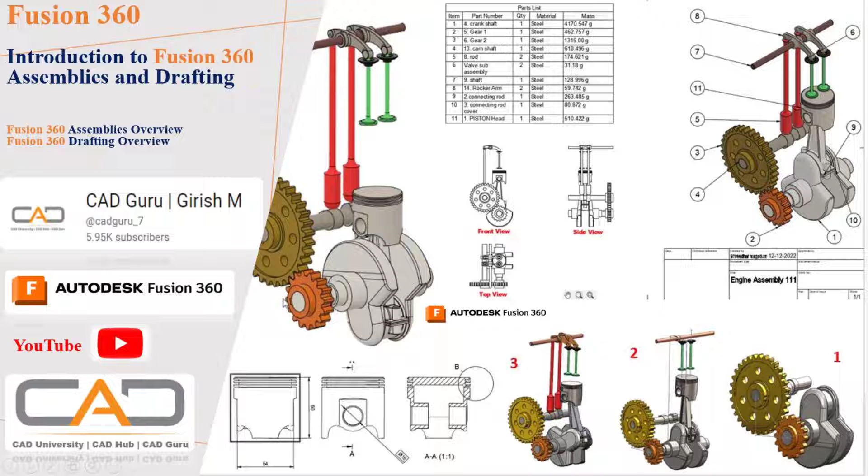You can create a project and add folders inside it, and save the components inside that folder. Let's say I'm considering an engine assembly here. For our convenience, I had already created the components and saved them into the folder. Now I have the components inside this Fusion 360 assembly, which I had already stored to showcase the bottom-up assembly approach. These are the components.

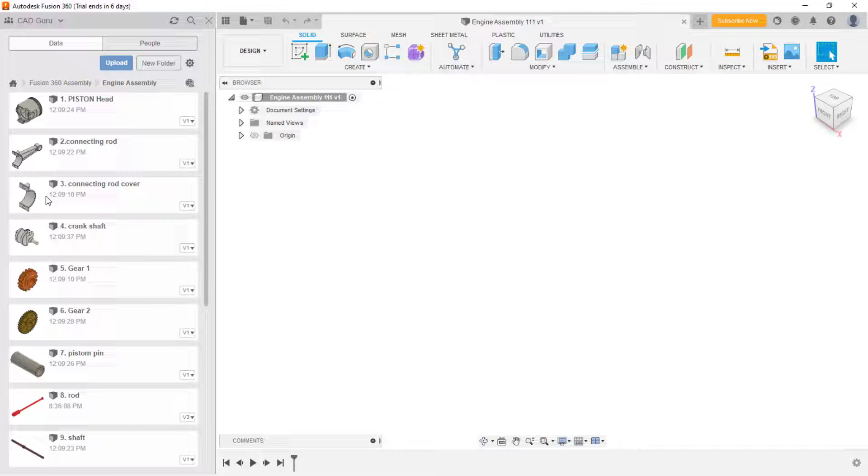Before dragging and dropping them and starting the assembly, I'd like to use the origin, and from this front plane create a sketch which will act as a reference. This is a triangle, so I'll take this as 65. Now I'll refer to these corner points as my reference.

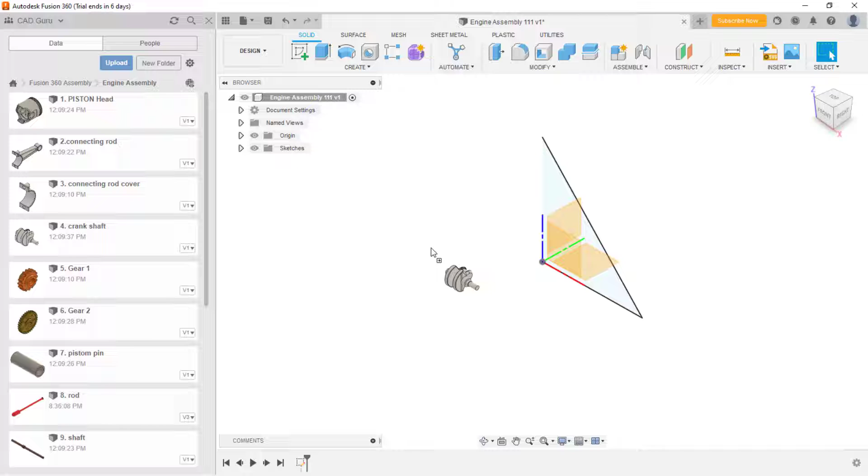First thing is this crankshaft. You could see the name engine assembly. Once I drag and drop it, the engine assembly part will change to assembly. Now you can use these triads to orient your model however you want, align it where you want, and then simply click on the green check, the best way to orient it.

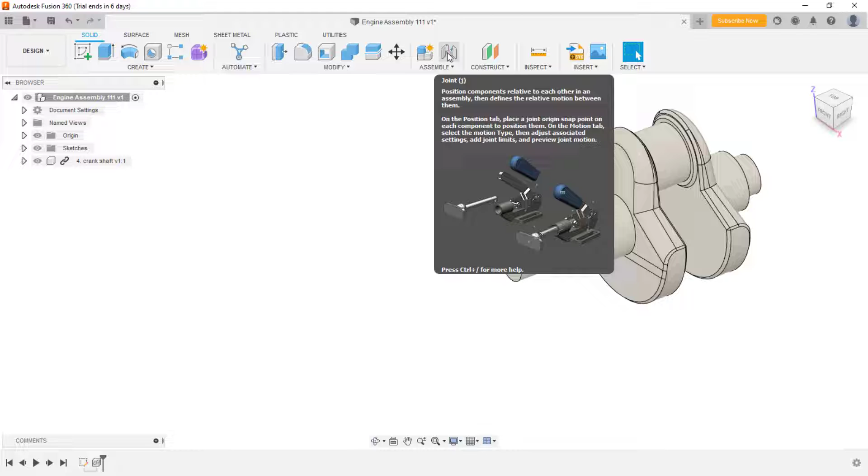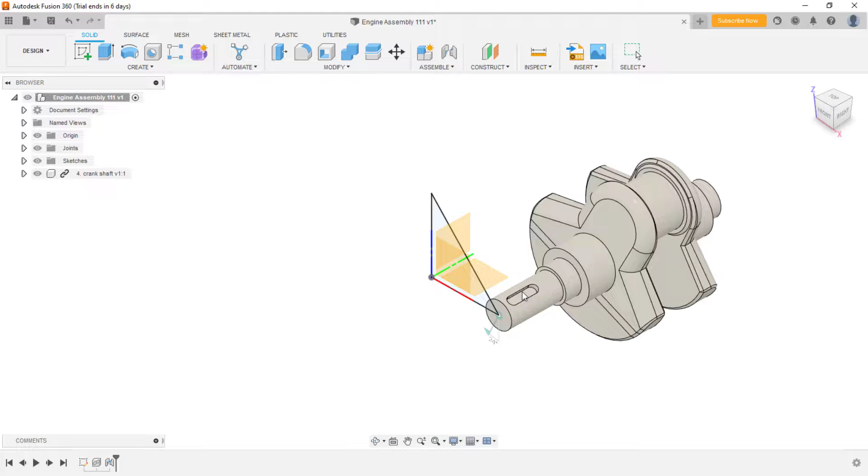Once that is done, you can use this joint, or the shortcut J, to snap the location. I'm going to select the midpoint, and it's going to have a rigid joint by default, but I don't want that. From the motion tab you can change it to revolute, so it will revolve around the z-axis. I want that, and the coincident will be automatically snapped. Remember, in SolidWorks we need to define multiple mates, but here it's one, so in one shot it will take.

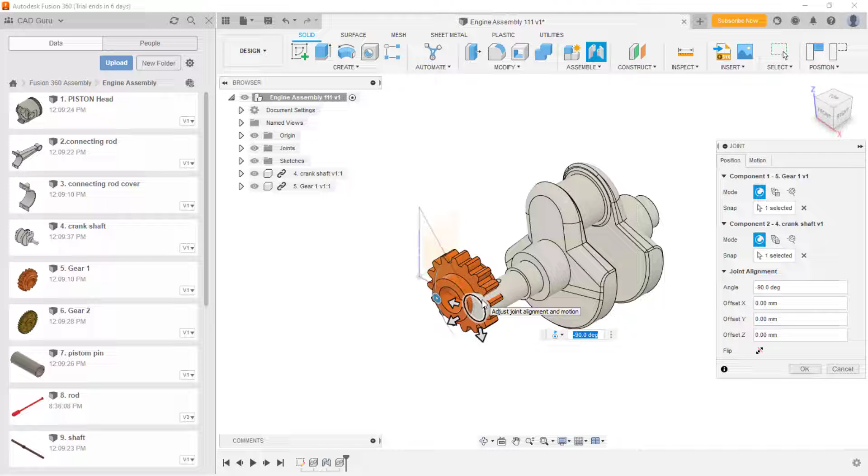Now I need this gear. I'll drag and drop it. Once you do that, you can align it using the triad, and then activate J between this face and this face. I need the same setup, but this time I don't want revolute, I need rigid, because anyway I'm having the shaft as the revolving part. So this gear should have the locking mate, so better make it rigid.

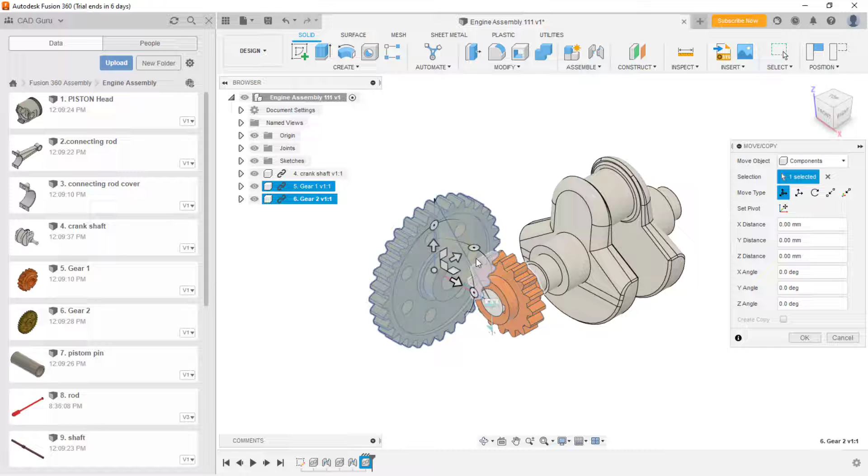Now this is gear 2. I'll add it again and orient it. For this gear, I'll select this edge and this point, and now I don't want rigid here because it should rotate, so I'll use revolute. Yep, so this much is done.

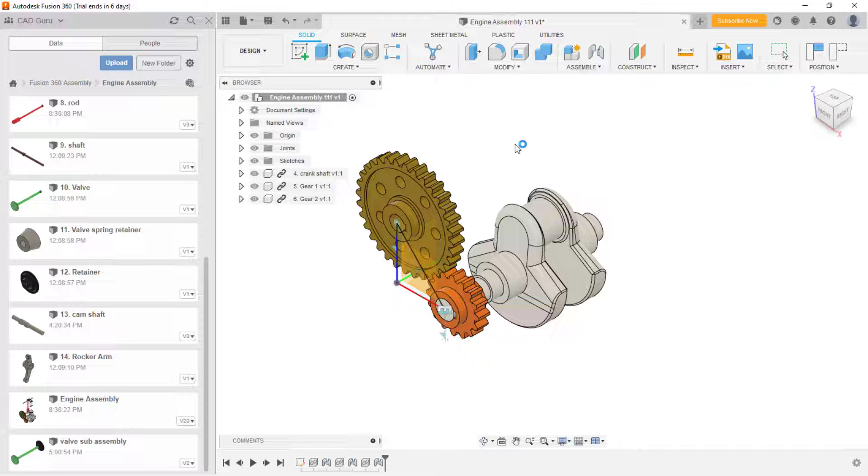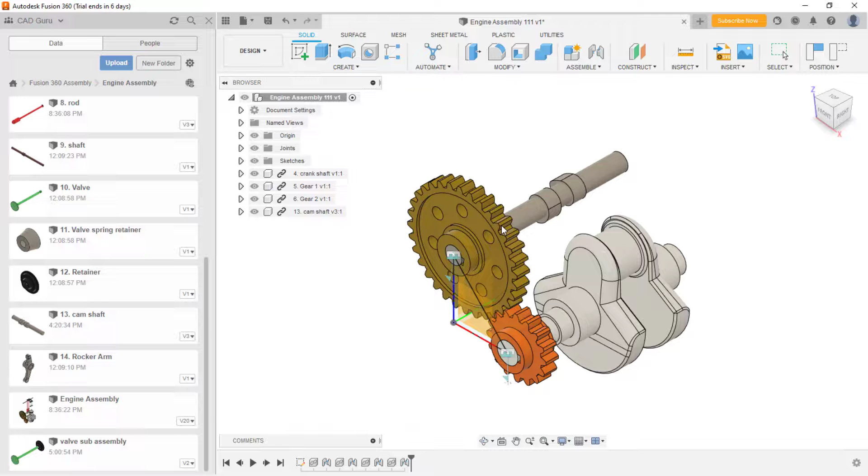Now I need the linkages, so we have advanced mates, and I'll showcase that. Before that, I'd like to add this camshaft here, which will be helpful to add the valves. Again using J on these two, it snaps automatically, but here I need rigid. I'll just snap it. Now this has the linkage with the gear.

Now I'd like to add the motion link, which will help you capture the preview. For these two mates I want to assign the gear mate, so you can activate the reverse. It's 360, and I'd like to change the gear ratio. I'll take it down, since it's too much, to 0.5, yeah, so this will work fine.

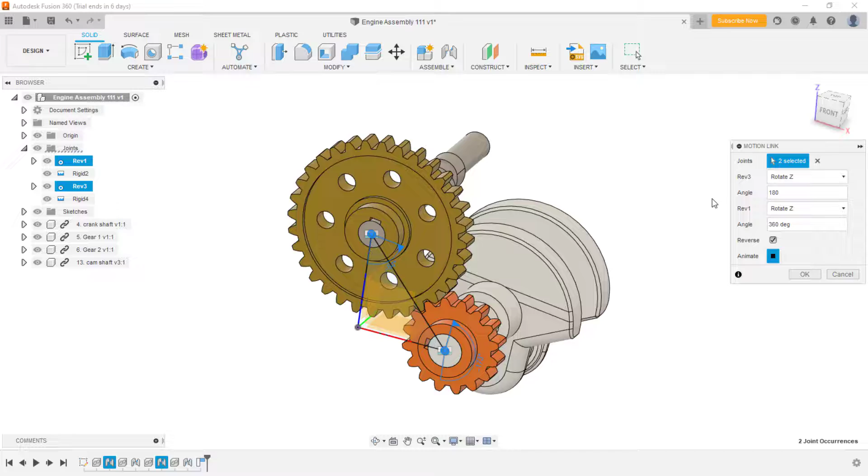Even you can change it with respect to angle, 360, and this is half of it, so 180, and this will affect the same thing. This is kind of the gear ratio. So this gear ratio will be activated, and now you can use it whenever you want.

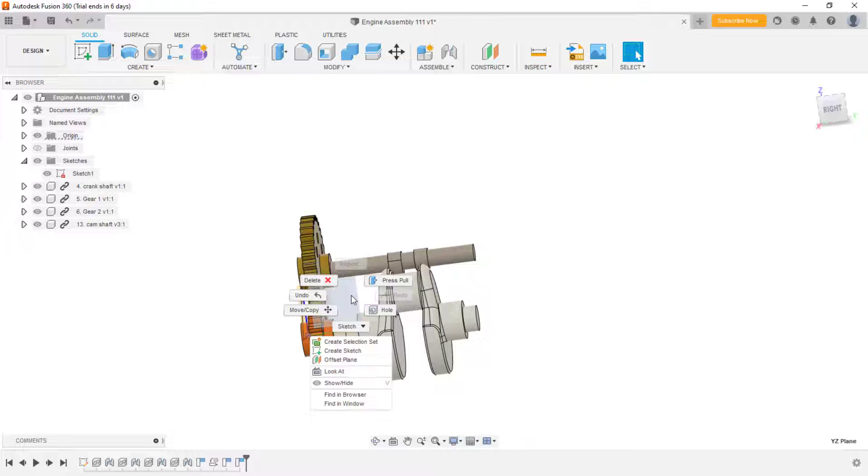Now I do need some references to add other components. So I'll refer to the origin and show all the origin references. This plane I need—right click on it and create sketch. To place other components I need again the reference axis and the reference point.

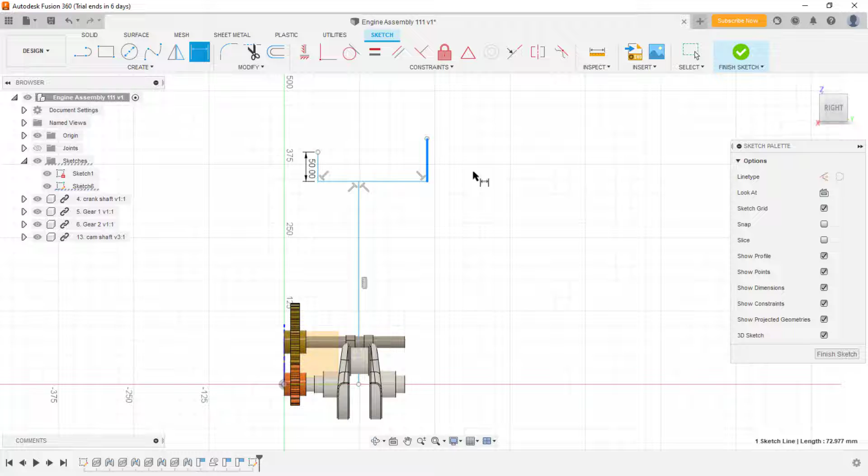I'd like to add this sketch, as you can see, and specify the dimension. Activate the dimension tool, D is the shortcut. I'll take this as 50 on both sides, and this dimension as 15 and 15.

Now this line should be exactly at the symmetry between these two edges. I'm using shortcuts here. This point should be aligned with this, so just select these two points and use make vertical or horizontal. Okay, so this is fine.

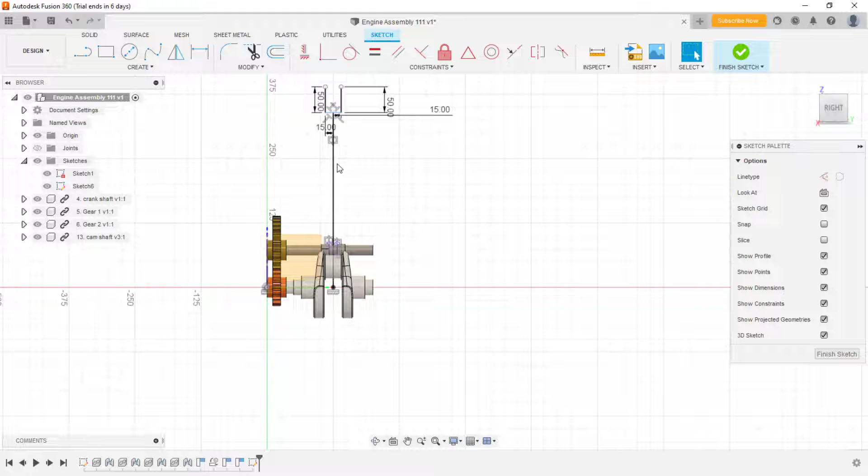So the dimension I need—the vertical dimension I need to assign. I'll just use the D shortcut and select this line. This is 300, just for reference. Okay, yeah, the first sketch is done.

I'd like to add one more, but I need a plane now. The plane should be on this particular shaft, so I'll use the offset plane. I'll select this plane, and instead of distance, I'll select the object—this time I'll just select this point. If I click OK, I'll be having the plane on this.

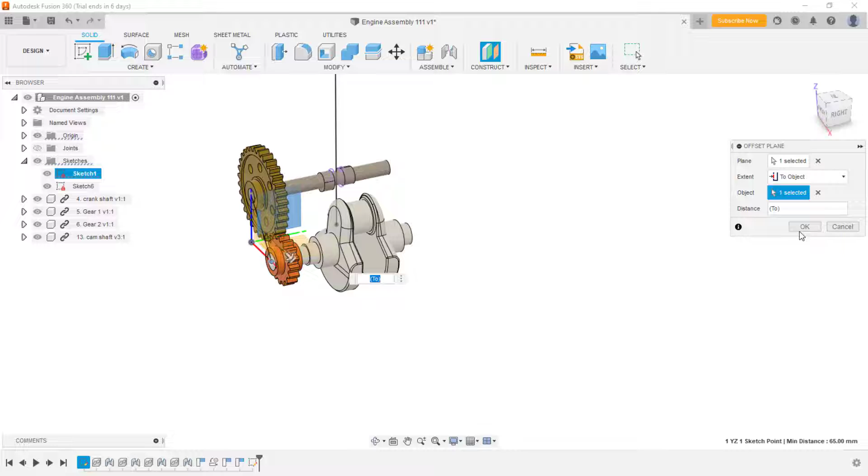You could see, right click and create a sketch on it. You can refer to the other component's origin and reference planes, but as you move them, they will be having degrees of freedom and might change, so it's better to create reference planes. Okay, I'm using the same sketch here.

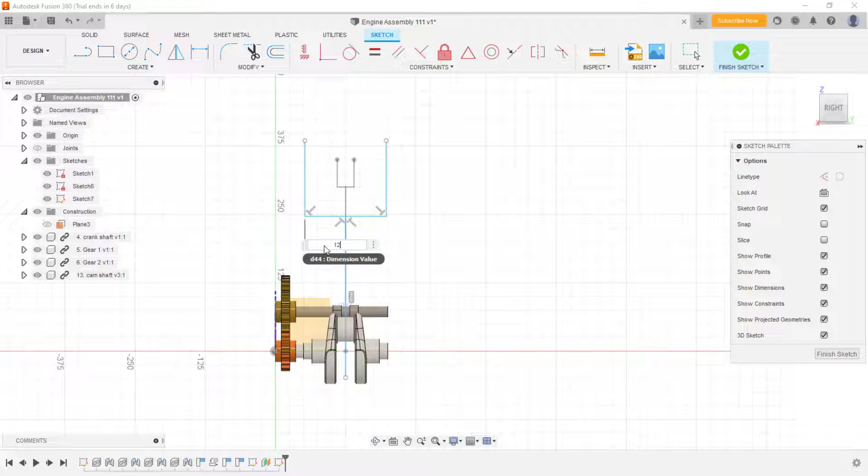This is to add the inlet and outlet valves. So this is 200, and then I need to define this as 50. Okay, and this point and this point, snap it coincident. Done. So this is fully defined.

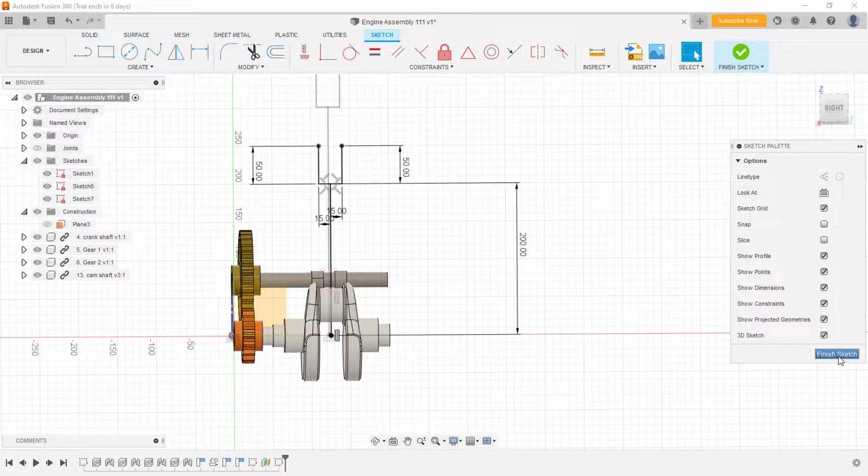Just finish the sketch. Now one more sketch I need, which should be exactly at the symmetry of this plane. So here what I can do is I'll create one more plane, offset. So reference is this plane, the object is this, and the reference is this point. So if I do that, I'll be having the plane exactly on that location.

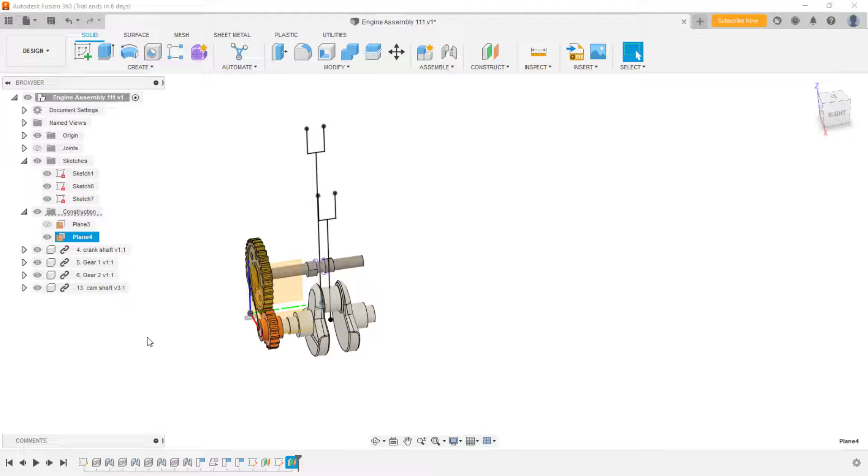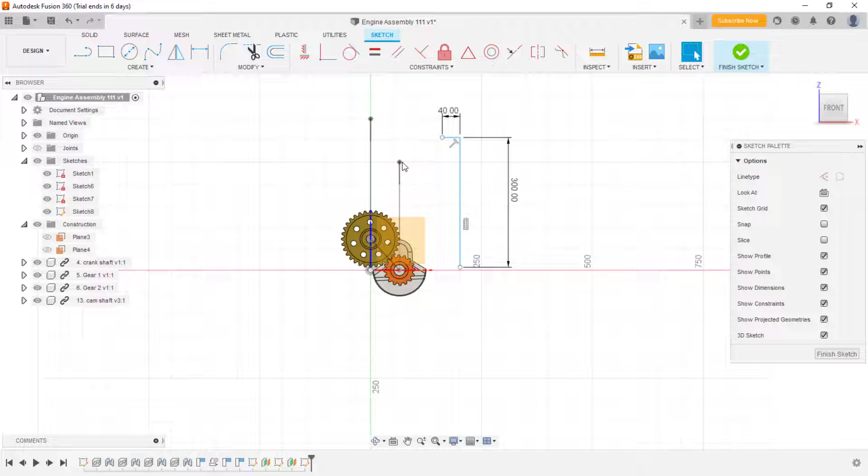Could see. Now simply right click and create sketch. The same sketch, but this time to place the top shaft, I'm using it. Okay, so I'll take this as 300 again. This is 40. Okay, and then yeah, this is vertical, and then I need to snap with this. I'll use the collinear. Yep, fully defined, green shine.

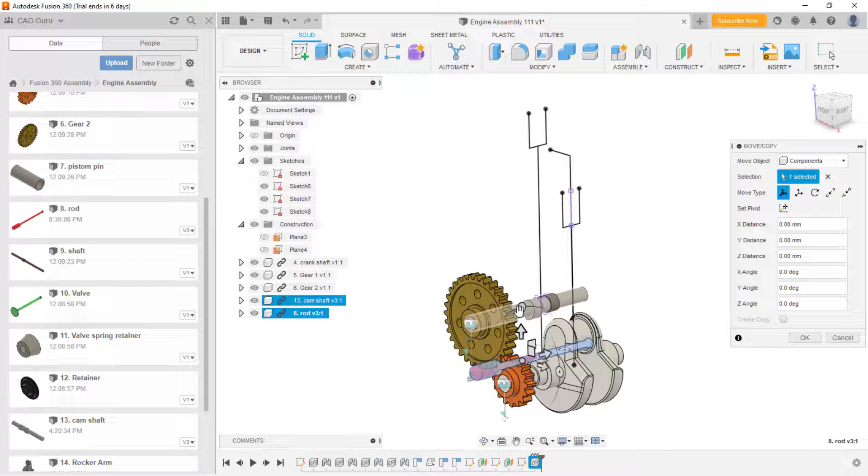Now I'm having the reference sketches to align them, so I'll add the components. Now this rod, I'll just simply drag and drop it, and this should be oriented according to the requirement, and then J shortcut for the joint, this face and this line. I don't want the rigid, I want the slider up and down.

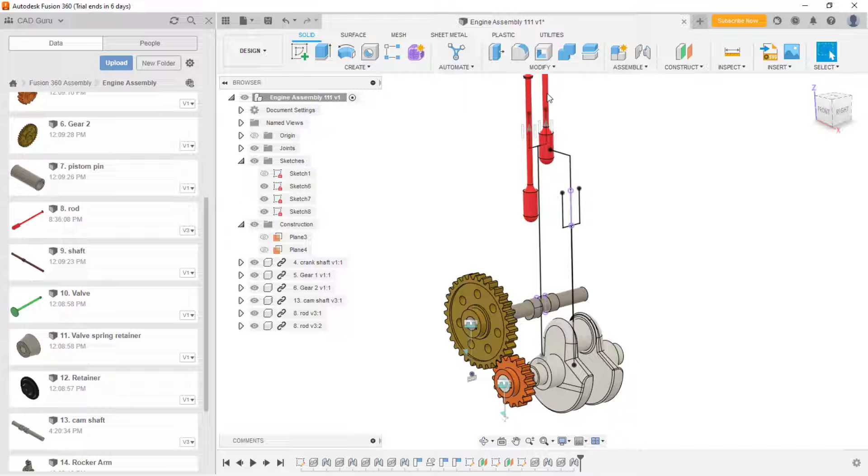I'll activate this. Okay, I need a copy of this rod. Right click, copy, and again right click and paste, and just drag it out. This quick access tool will help you to do that. Just switch, select this again, automatically it will take the previous mate. Don't need to worry, these two are fine.

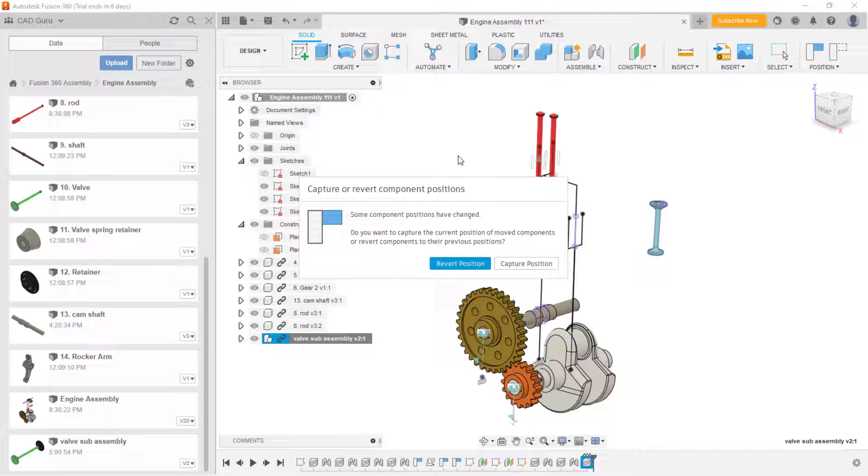So next component, I would like to add the sub-assembly this time, the valve sub-assembly. Just drag and drop it. Now simply orient it. Yep, so again, before doing it, right click on it and create this rigid group, because this is a sub-assembly. If you just select a component, only the component will be mated, remember that. So like this, if you just hit on green check, it will take entire assembly.

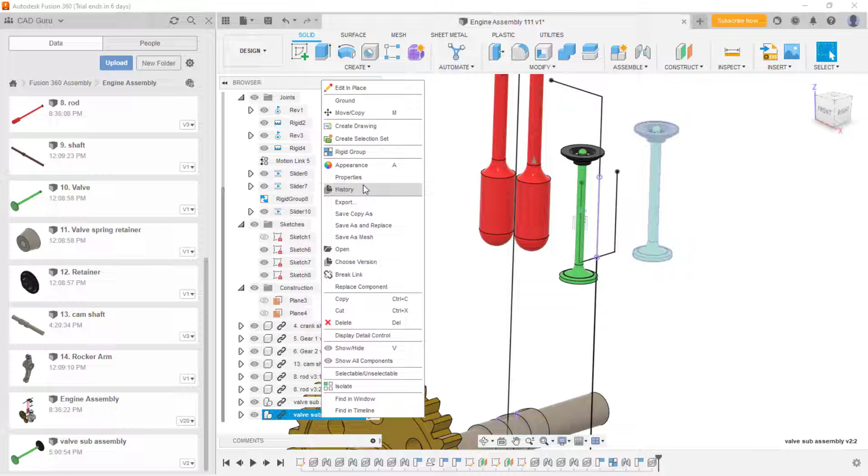I need a copy of this. Again right click and paste, and just capture the location to have the same previous one, and then again make rigid group, J shortcut, this and this. Yes, this sliding along Z. Yep, so we have added the components which and all required.

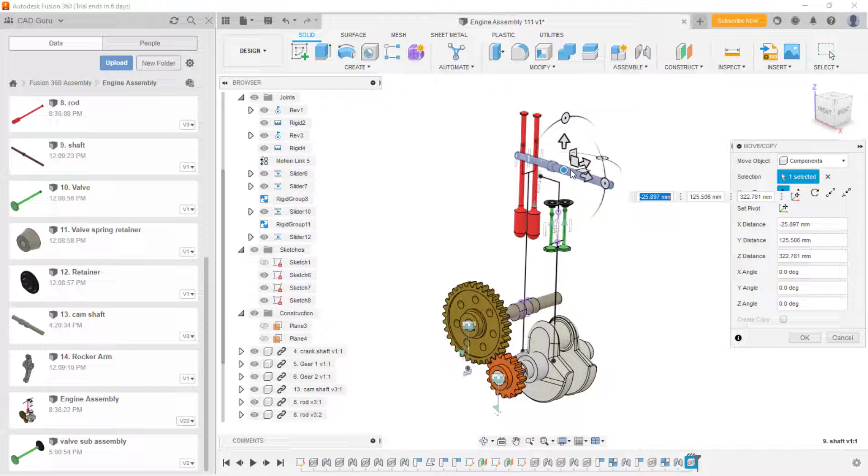So now again I need the shaft. So this shaft, I'll place it here, rotate it. Oh yep, so this should be exactly at the center. So if you want to snap the center, you need to zoom in and just hold the shift and try to hover, get the center. The same thing here as well.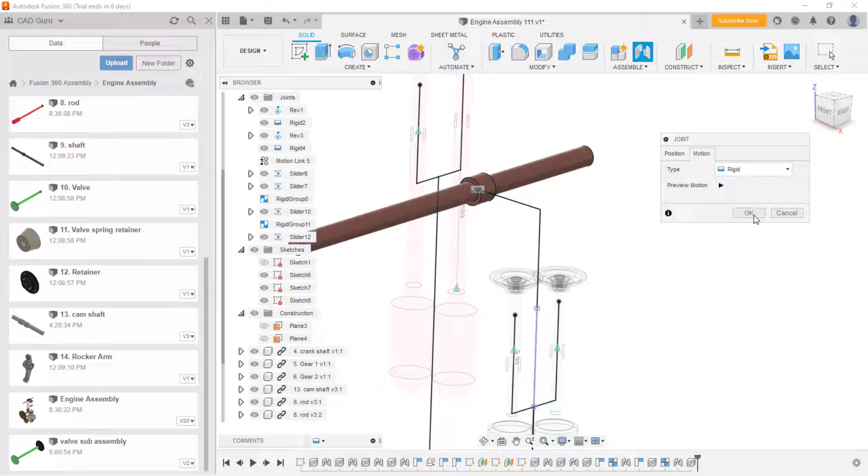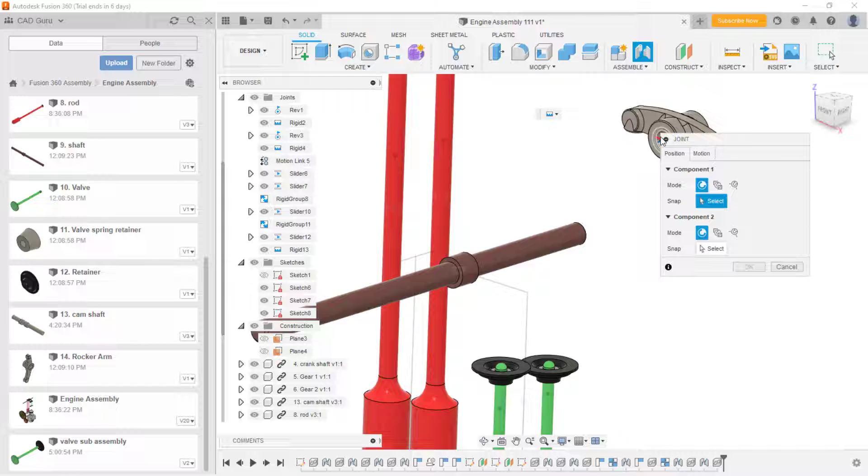Okay, I want it to be rigid, because that shouldn't rotate as well. If you want, you can have it rotation, but to assign all the mates I want it to be rigid. So this rocker arm, I'll just drag and drop it again. So just place it wherever you want, orient it properly using this triad. Click OK, J shortcut the joint, and then this edge reference, it will snap this XYZ coordinates again here on this. So automatically it will take the coincident and the concentric, and you just need to change it to revolution, that is concentric here. Quite easy to use interface here.

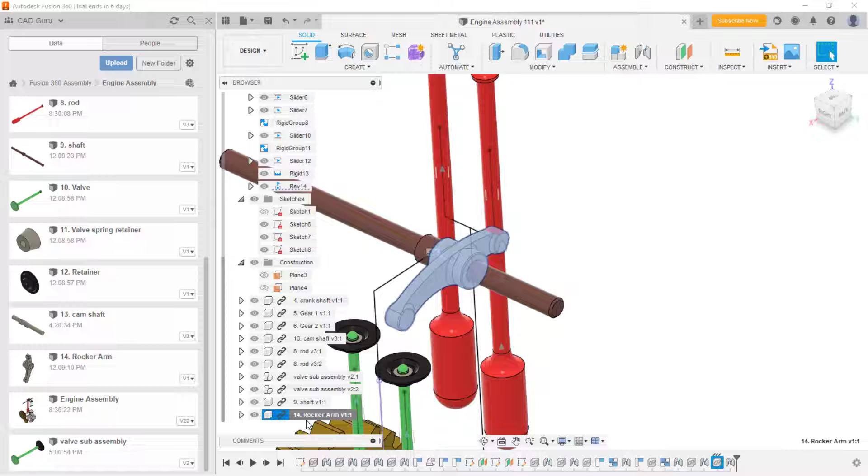Need a copy of this, right click and copy, right click and paste, drag it out, click OK, and then same thing, this edge and this edge. By default it will take the previous mate, don't worry. Okay, this is done. So next thing is only few components remaining.

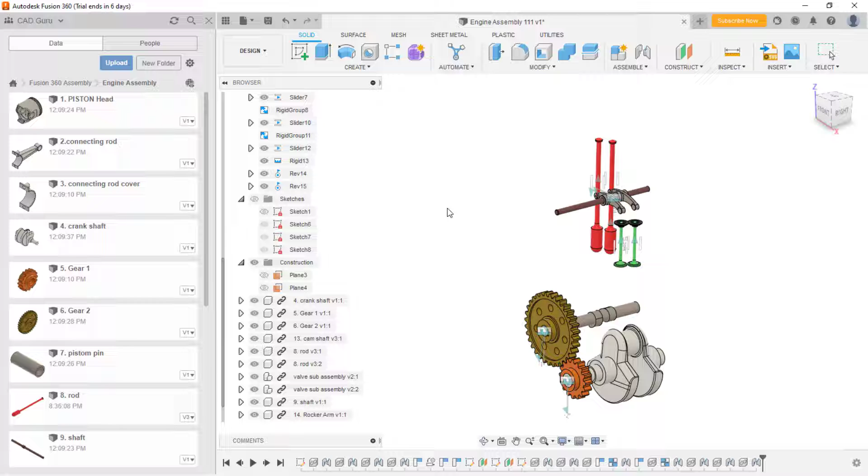One is piston. I would like to just hide these all the sketches, I don't want them now. Just scroll up, you have this connecting rod and the connecting rod cover, so and piston head. So I'd add this connecting rod, and now I'll place it here.

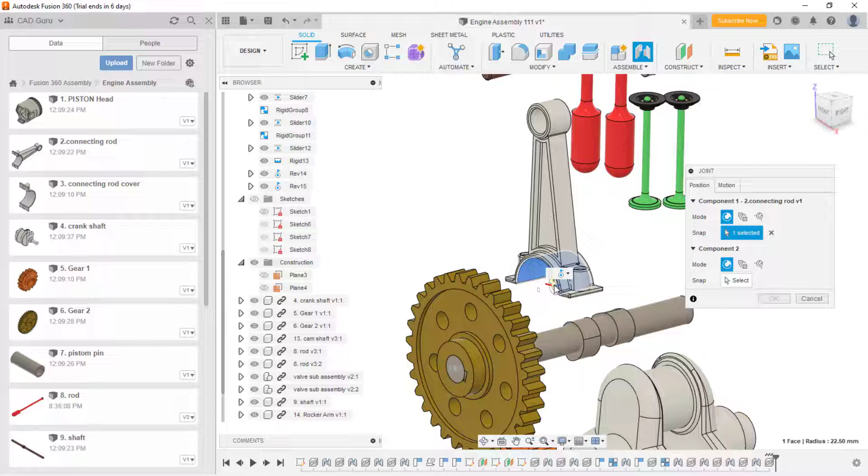Okay, now I would like to have the center point snapped, so J shortcut, joint, hover. Yep, so again here on this, just check this is not the center, this one. Okay, we have the rotation, revolution along Z, this is fine. And then now I'd like to add this connecting rod cover here.

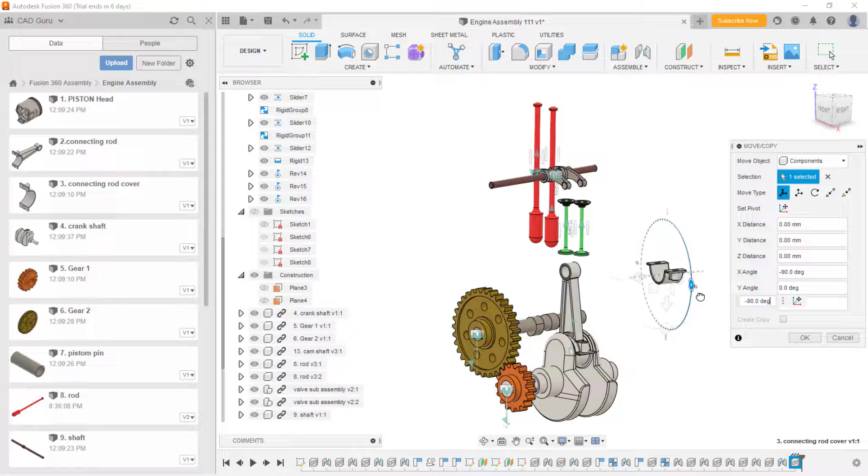Very important thing, in SolidWorks we're gonna define the coincident mate, parallel mates and all here. Now to assign this, could see, I'll click OK. Now this face, hold the shift to just select this center snap. Yep.

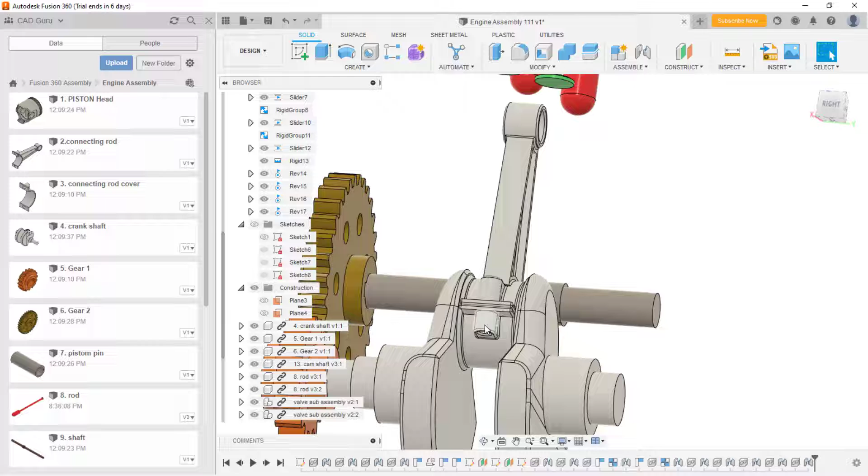Now this face has the rotation, but it doesn't have the coincident between the top connecting rod. To assign that, I'll activate the joint again, select this face and this face. This will take the revolution along this axis, so it will automatically take the coincident for that, remember. Multiple mates can be assigned, but it needs some intelligence to apply them, so sometimes it is quite difficult.

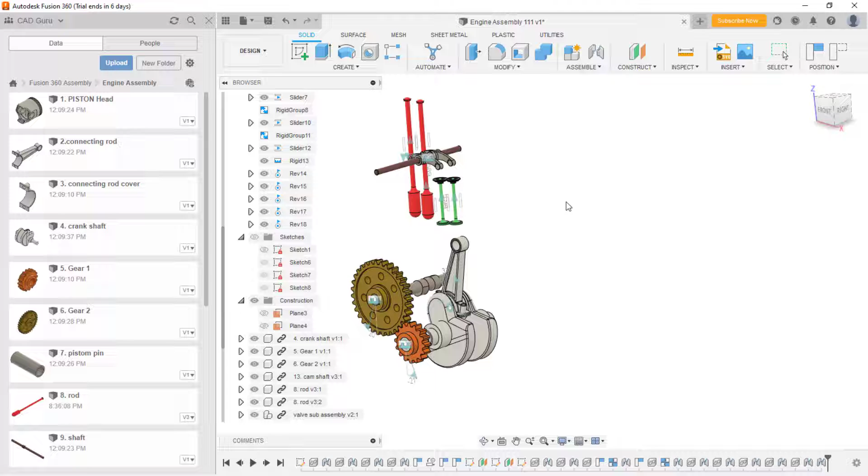The final component is the piston head. Simply drag and drop it here. Again, it is a bit complicated to assemble it, just rotate it according to your requirement.

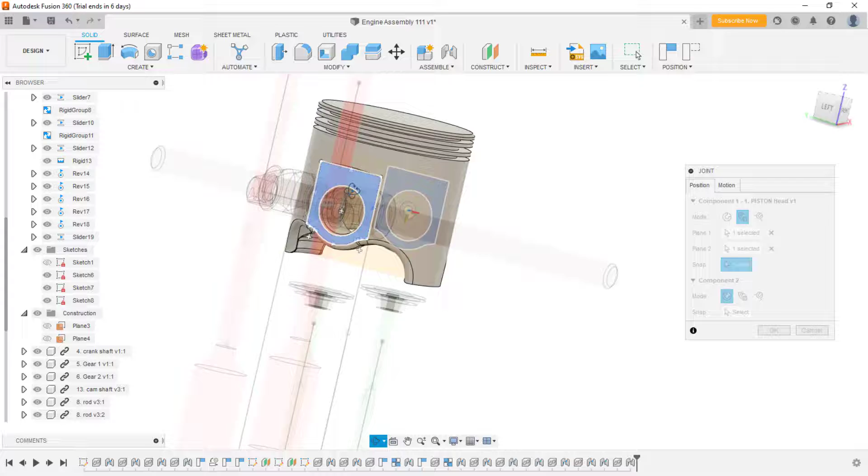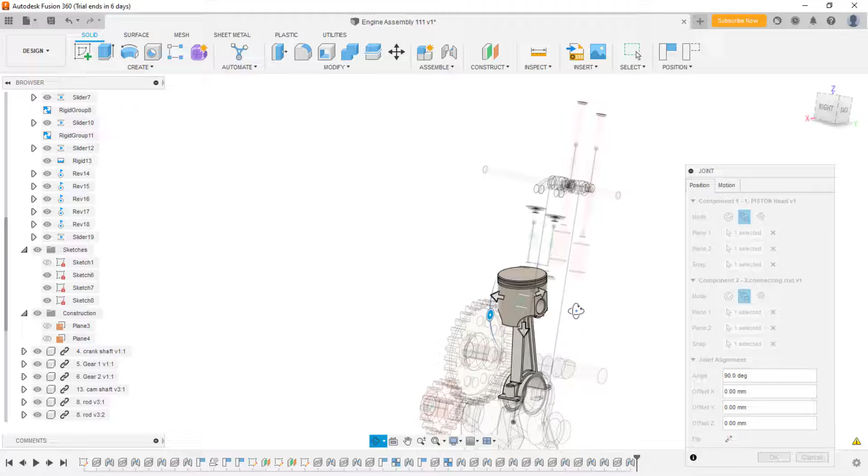Now first, I'll assign the width mate kind of thing between two selected faces, and automatically it will snap the origin. Just select that, and for component two, I'll switch to between faces, this face and this face. Once you select these two faces, it will automatically help you select the center point. Just snap it. I don't want the sliding, I want the rotation, so you can switch the motion, change it to revolute, then click OK.

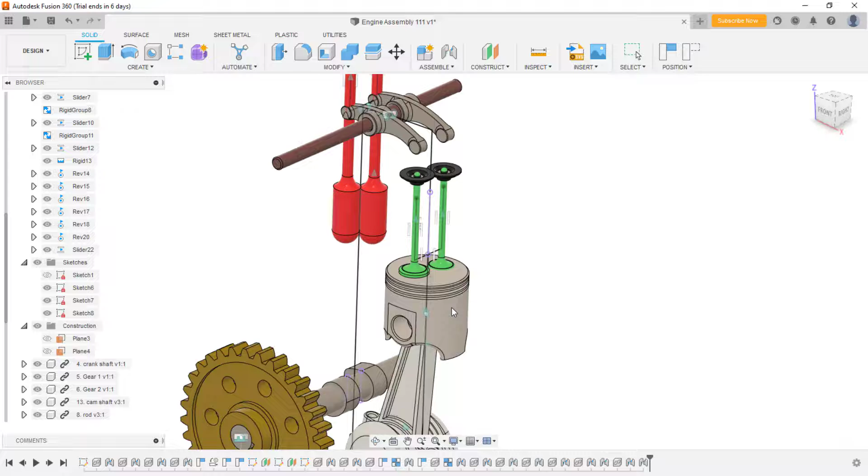Now I need the sliding as well, because this piston should orient to this, right? It is 90 degrees automatically, don't need to worry, just click OK. Now this is aligned with the axis and it has the rotation as well. I'll hide all the sketches and the joints.

So this is how you can deal with the assemblies. It is very important to know how to use the user interface and the tools very efficiently.

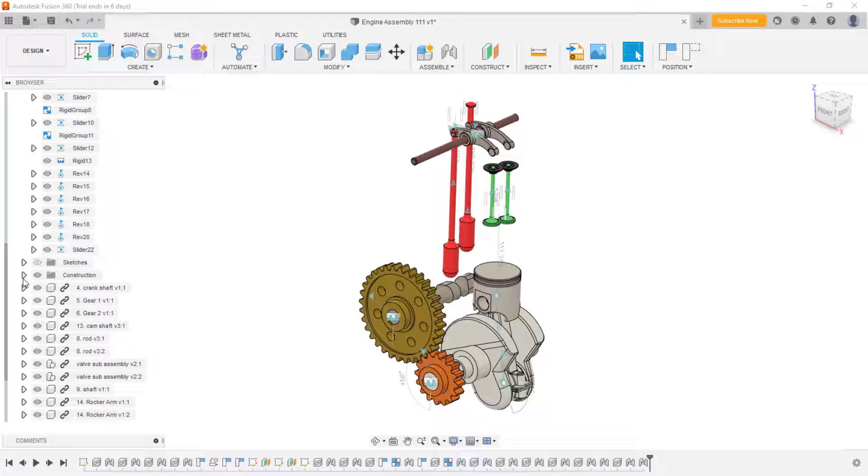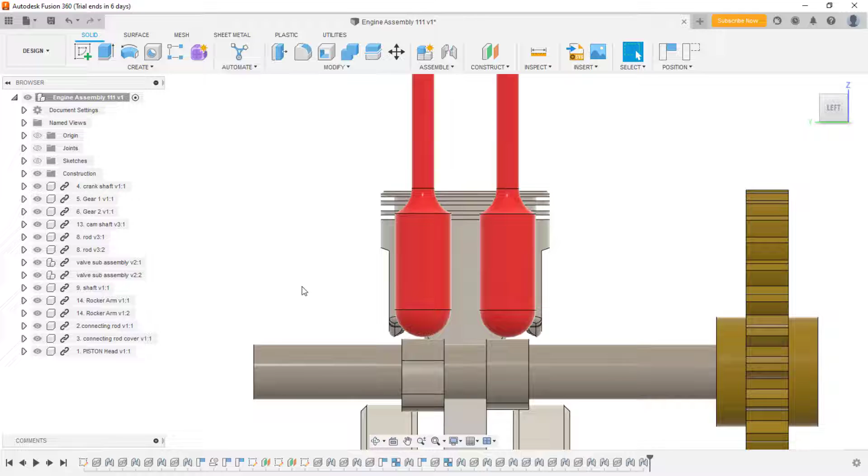Now I'll simply hide everything, and I'll position everything properly. I'd like to take the left view, these dots exactly here, so that I can assign the contact sets and animate it according to the requirement. So this is fine here.

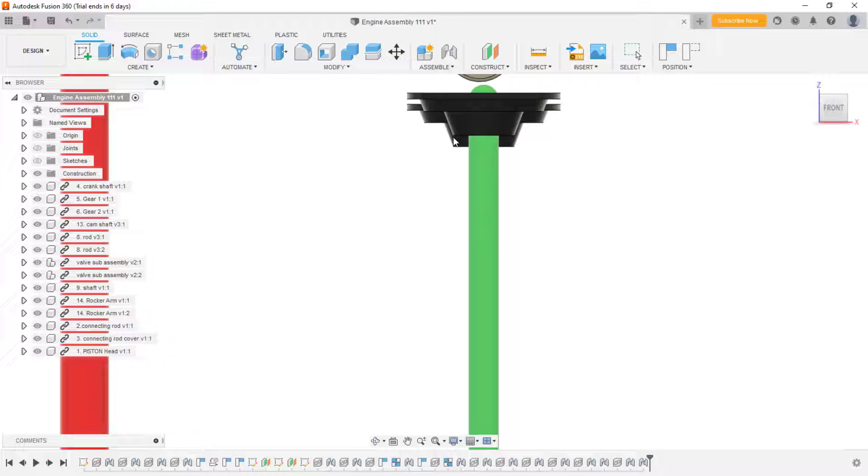Front view, just orient these arms, so I'd like to have this distance, this is fine, and here as well. These are the valve sub-assemblies, so I'll orient it like this, so the placement should be fine.

Once the placement is fine, you can activate the contact sets using the assembly dropdown. I need the joints now. Before that, let me just check these. You could see this is not this one. Yeah, slider 12.

Just activate it and change the value to 18.45, the exact position. The same thing for this, so it is the rest position. Wherever you make the changes, it should come and sit there only, because that is the rest position. Here as well, just check the dimension, minus 110.381.

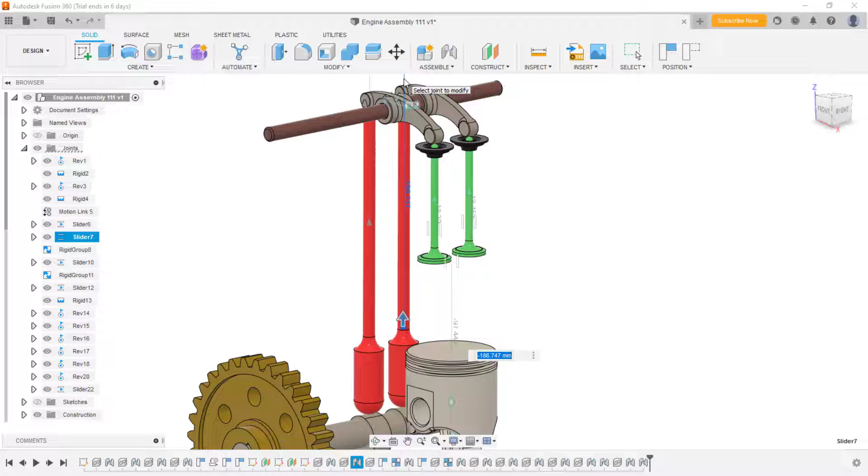I'd like to add the same thing for this slider. Again, check the value, it is minus 186.74, just add the same here. The resting position is important because if you move the component, it should come and sit back to the original location once you remove that movement. Let me showcase the same here.

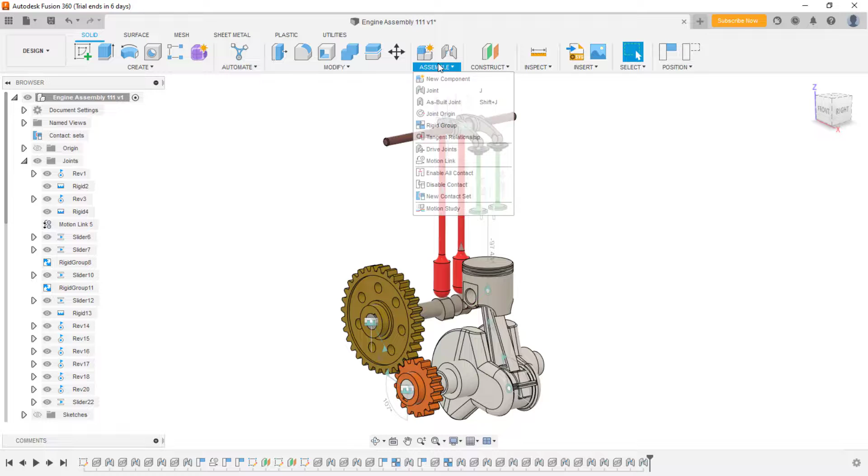Let me go with the contact sets. This is enabled now, I'll define the new contact sets. Once I enable it, only then can you define it. These two should have the contact set. Again, these two, it will be like in CAD and SolidWorks.

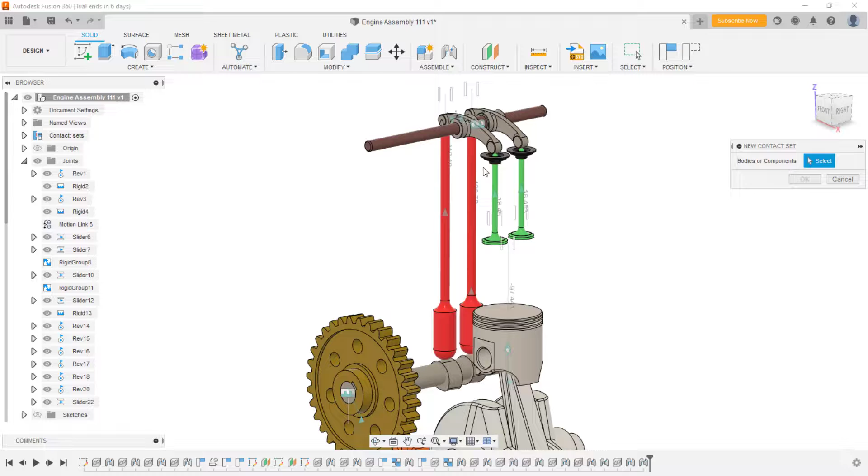Again here, this is a contact mate. For these two, we have the tangent mate in SolidWorks, but here we don't have it. We have the contact sets here for all. It's easy to define only a single mate everywhere, but it has some disadvantages I don't want to disclose, let it be for now.

So if you try to move this according to the movement, you could see the valve is even moving, and even the rod is moving. According to that, you have the mechanism, right?

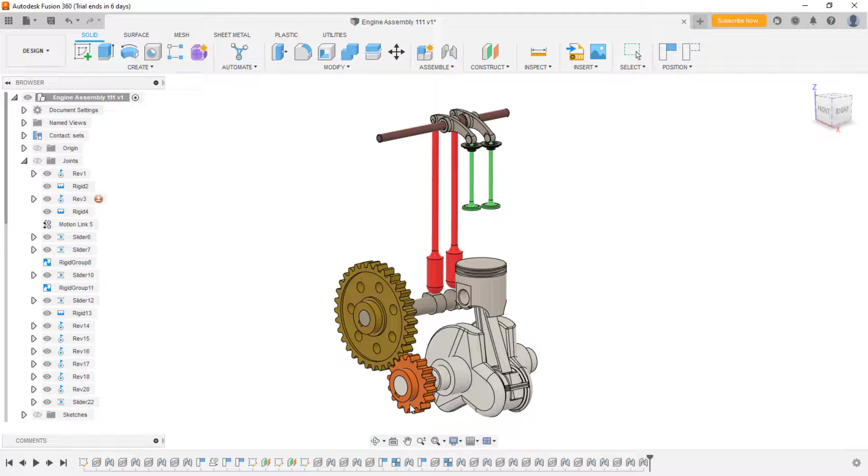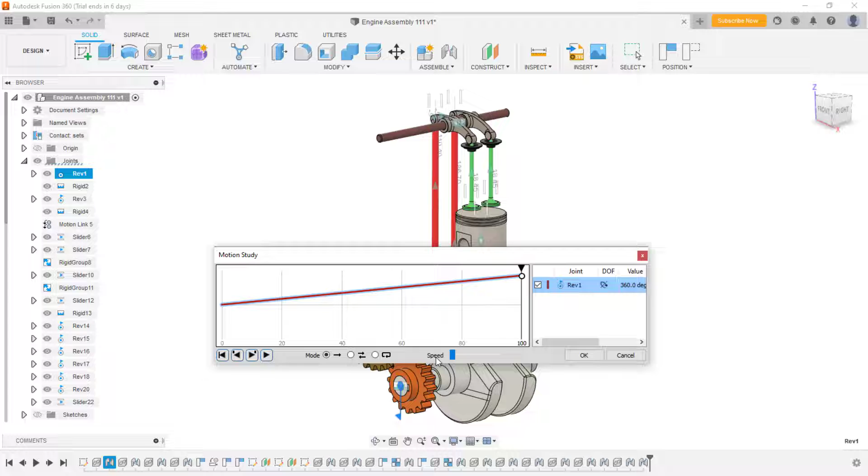If you want to generate this using the motion study, go to the motion study here, drag and drop the mate, this revolute mate, which has negative 2 degrees. I'll go to this point and change it to 360 degrees at 100 steps. So now this particular mate will rotate from 0 to 360 degrees, and you can animate this accordingly and simply play it.

Due to some glitches in the CAD, you won't get the proper animation for this. For others, it will create the appropriate animation, so you don't need to worry about it.

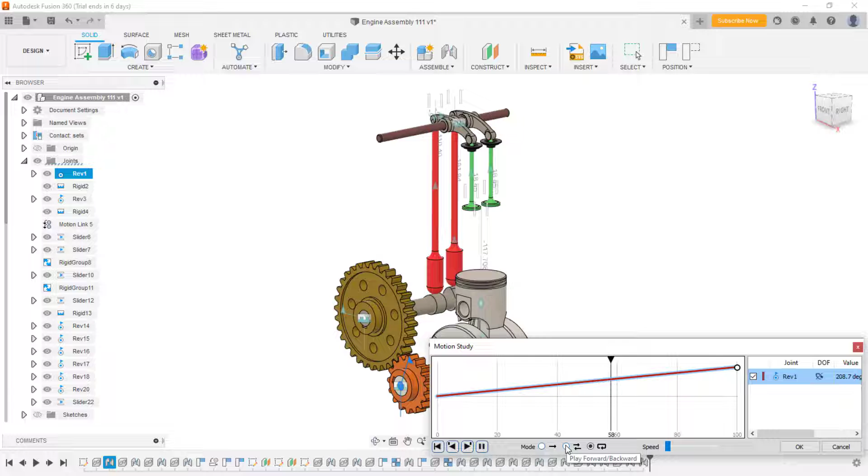Yep, so that is done. Next thing is to create the drafting, the assembly drafting. If you use this option here, we have the standard A3. I'm using ISO, so once you have it, automatically you're going to have the model tab.

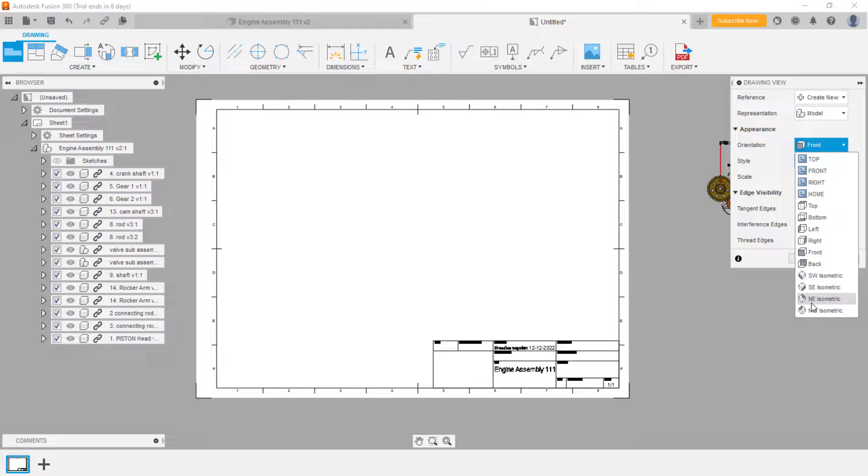From here, in drawing view, I need the isometric view, and I'll change the scale to 1:2. I'll change it to shaded view. Fine, so now next, I need the projected views.

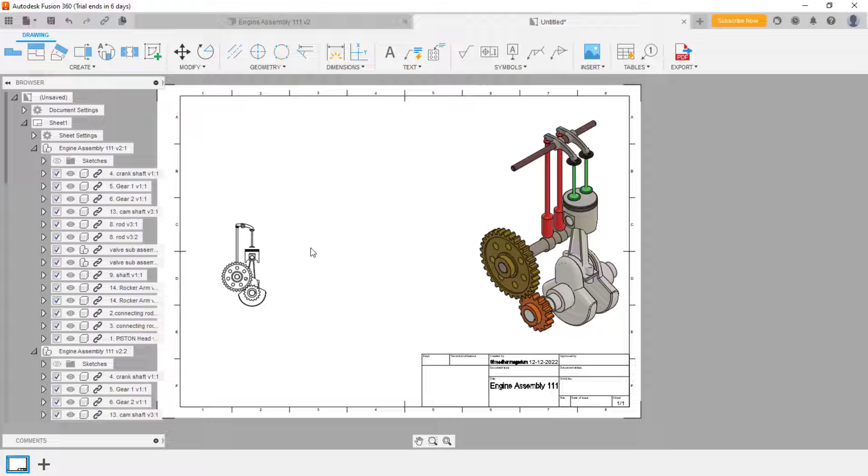The front plane is fine, sorry, front view. I do need the projected view for this, I'll click OK and switch to the projected view. Just select this drawing view and simply drag and drop it. So you could see this is the isometric view, and this is the top view.

Front angle, first angle projection I'm using.

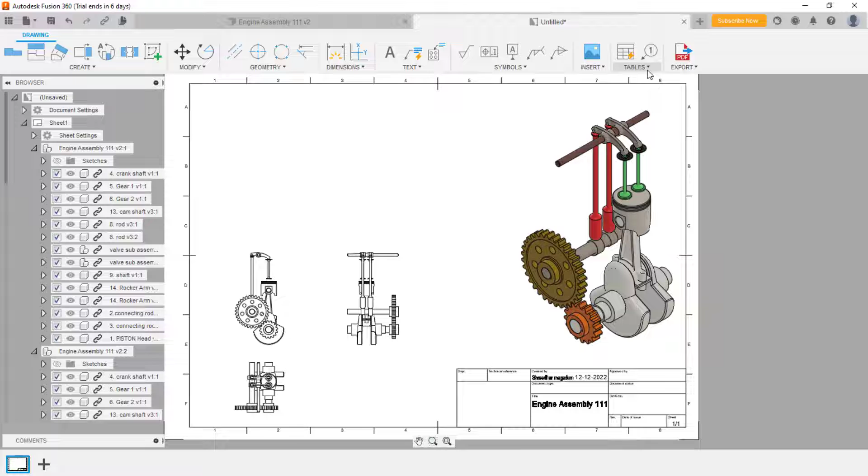Once you're done with this, you can even add the dimensions manually. I would like to add the table using the automatic method. Once you define it, automatically balloons will be created, and according to that, the table will be ready.

Double click on this will help you to change things inside the bill of material. You can remove the description if you want. If you want to align it properly, say you want the quantity in the third row, you can adjust it. Third column, item number, you can skip it if needed. Like this, you can customize your BOM table.

So we have the title direction, table direction, and we have the structure set to all levels, and we also have the first level option. This will help you add sub-assemblies as well.

Once you create the ballooning automatically, you can rearrange it. Simply double click on it and drag and drop it wherever you want. This is quite handy to deal with ballooning.

If you have the manual ballooning options, you can even use datum things, manual dimensions, geometric symbols, and all. Modify tools, create tools, and all - everything you can do here.

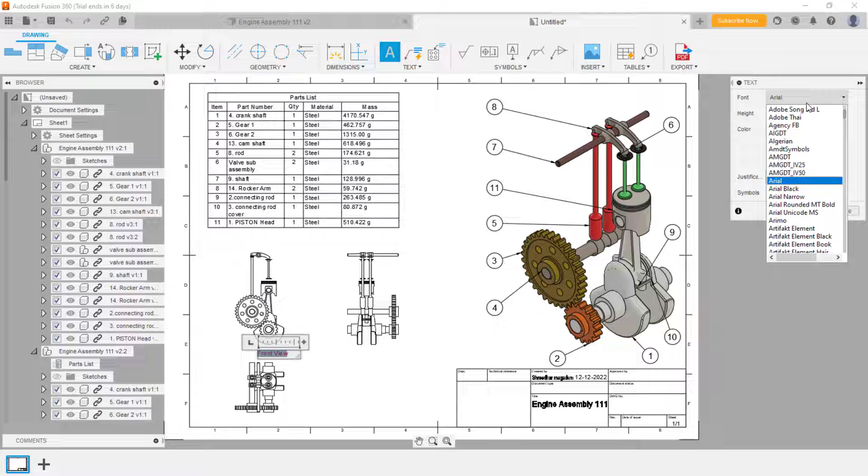For annotation, we can add a note. Let's say this is the front view, and you can even change the font color and the type here. Before that, you need to select the entire text and change the color. If you want to change the font, you can do it - here, Arial Black, bold.

Same thing, you can assign the views for all the other views. You can't copy it directly, but you can simply repeat the text, drag a box, and do the same thing for others.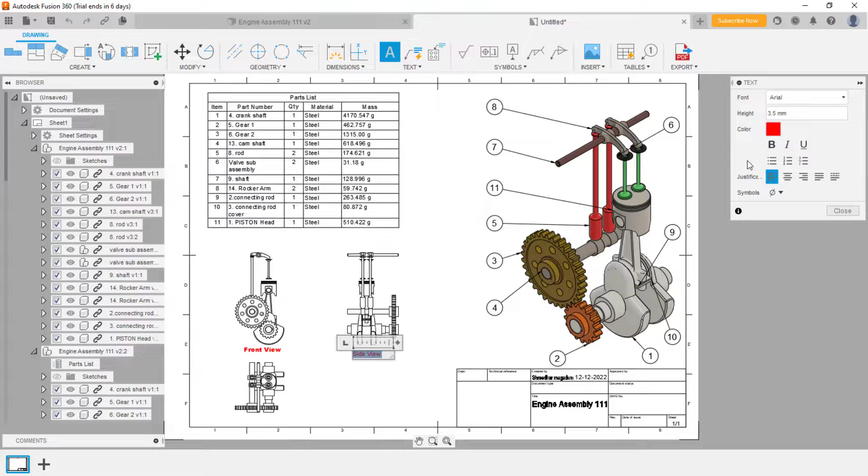So this is about assembly drafting.

If you want to change the template, you can simply double click on the drawing template and make the changes - finish properties - and now we will see the part drafting as well.

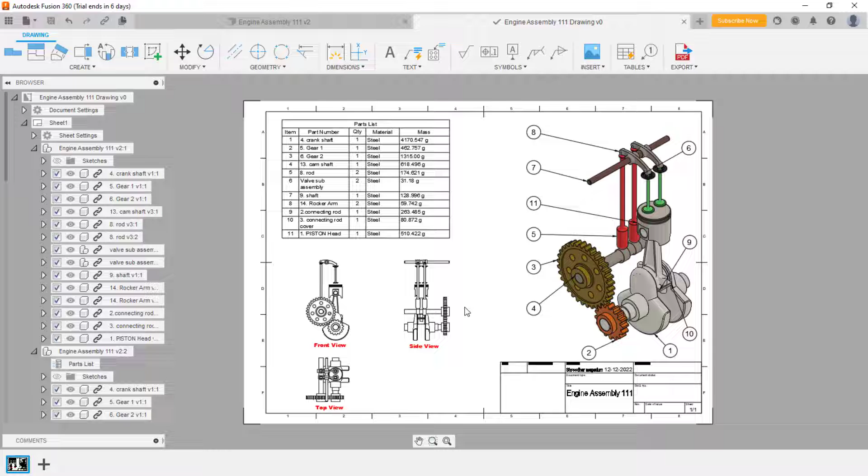Just the basics, I'm not going to go with the manufacturing approach. You can use this component, A3 format, ISO standard. I'd like to add the front view here, and I'll change it to isometric view from the orientation drop down.

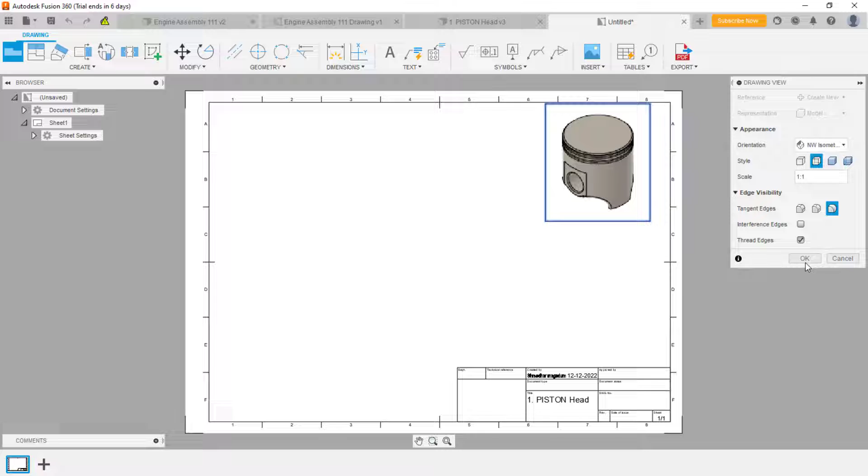Now double click on it to change the shaded mode, and then I need the other views with respect to the front angle, first angle projection.

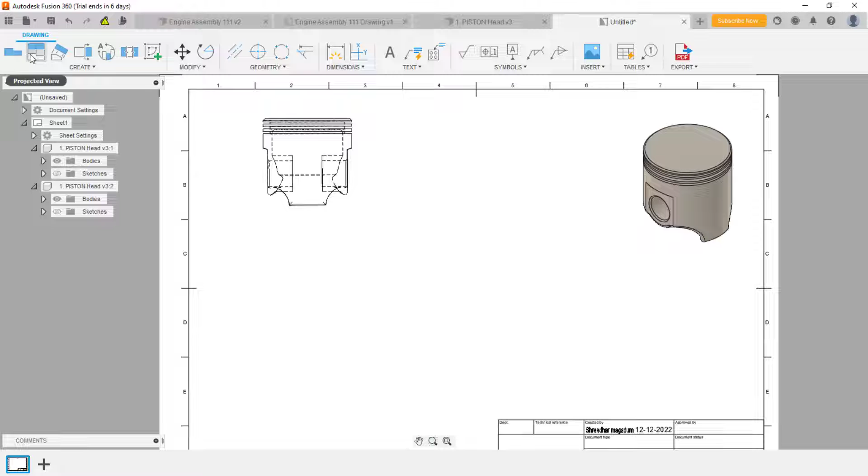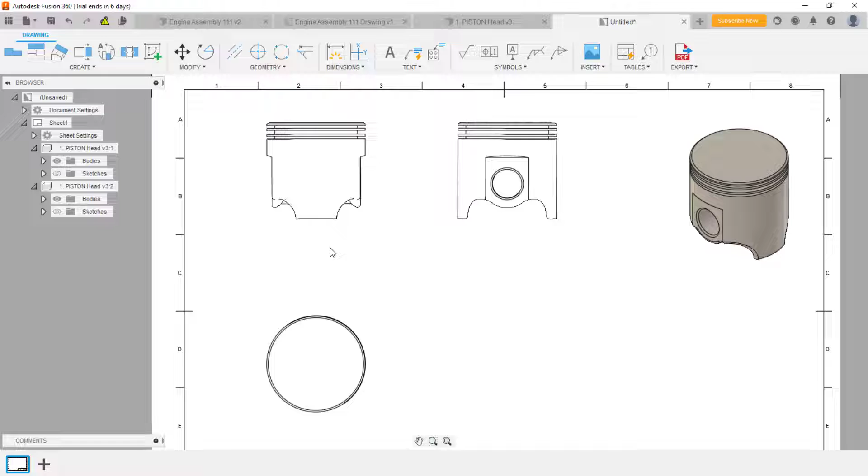I'll take the front view, place it here, click OK. Projected views, you can use it. Before that, I would like to have the visible edges only. This is now the projected view - this is the top view, the side view. You can align them and move your views according to the requirement.

And then I would like to add the section view. I'll select it, draw a line exactly at the center, green check, drag it out. You have different options here. In the depth, we have the slice only option.

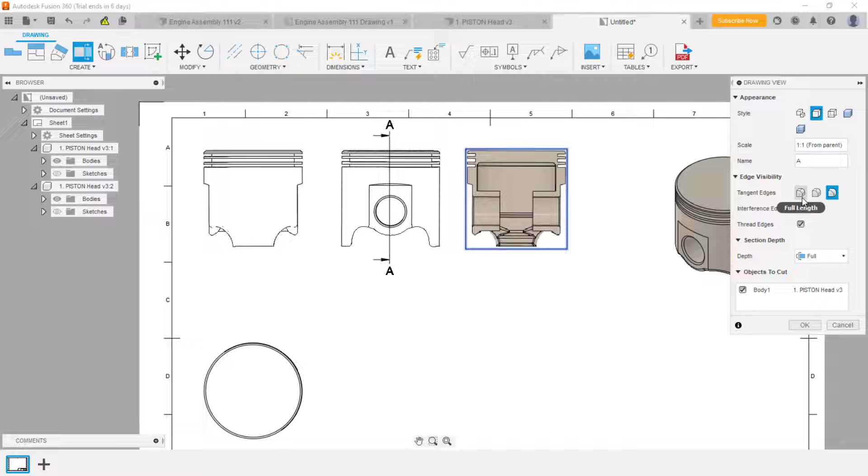If you want to take full, you can have it. If you want to use the distance, you can even use that. Thread edges, we have tangent edges - if you want to deactivate, you can do it. And then we have the styles as well. Hatching and all is automated here, we can't customize it.

If you want, you can deal with the drafting tools. Next, the detail view - you can simply drag it to the location where you want it. If you want to change the area of it, you can do that later too. So these are a few options available here.

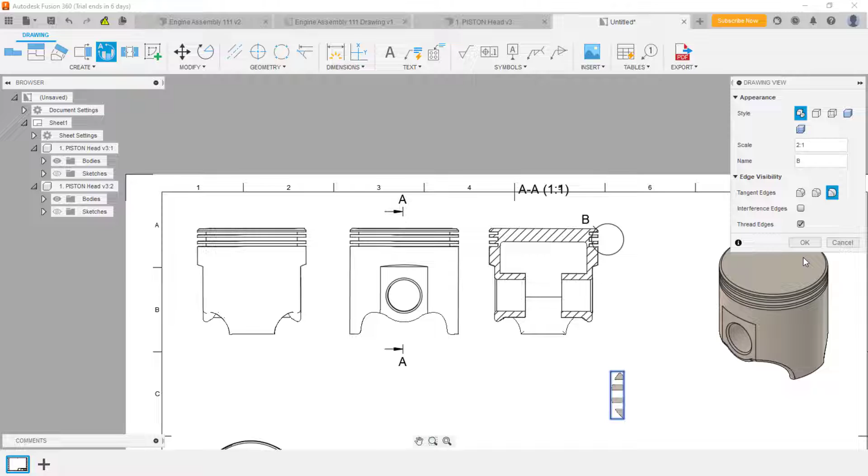The scaling is by default multiplied by two. You can drag it out to increase the detail view size.

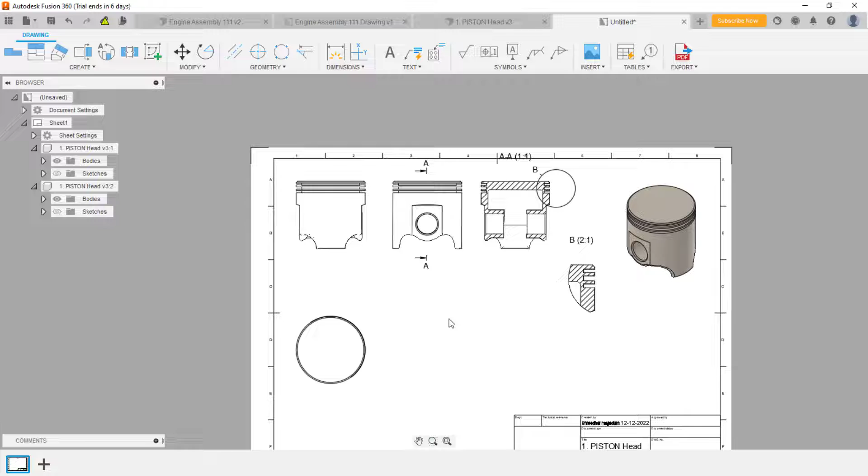In Inventor, we have retrieve dimensions - if you've created the model using Inventor, you can retrieve the dimensions feature by feature. But in Fusion 360, that tool is not available, I believe. In future they might add it - if it's there, I need to research about it.

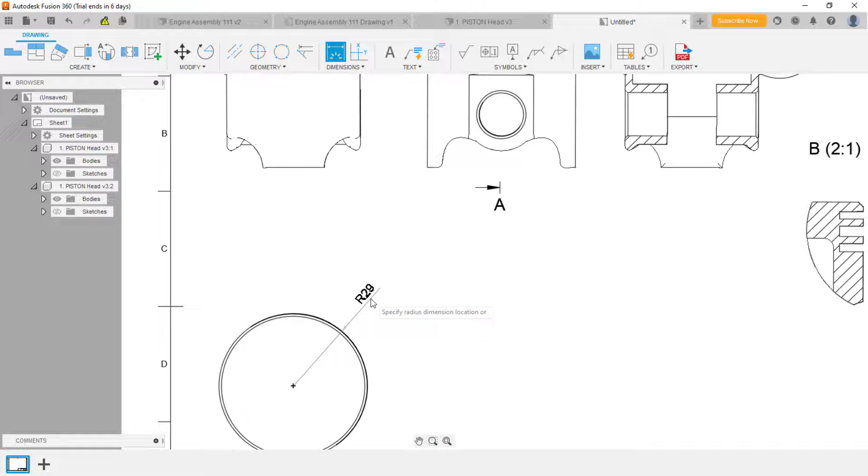Using the manual dimension, you can define the dimensions here. With respect to the ISO standard, it's going to take the orientations and placements.

Like this, you can specify the dimensions, GDT symbols. If you want, you can even specify angles and all - everything you can add. This is quite simple, as we use in Inventor too - the interface is the same, but it's quite advanced.

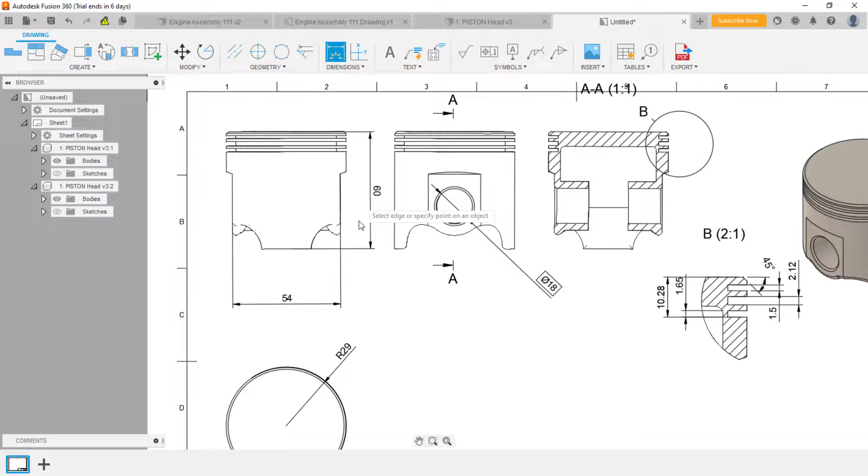Like this, you can deal with part level drafting. You can place your views according to the requirement.

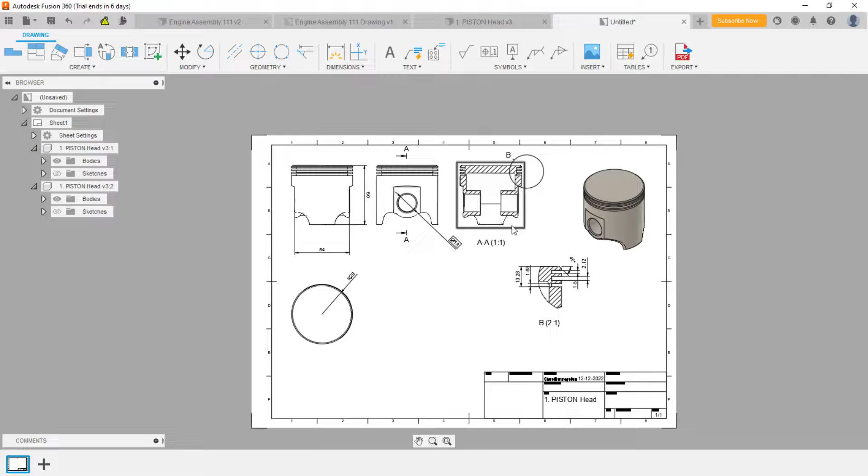That's all about this session. In this session we went through the Fusion 360 assembly workbench, then assembly drafting, and then part drafting.